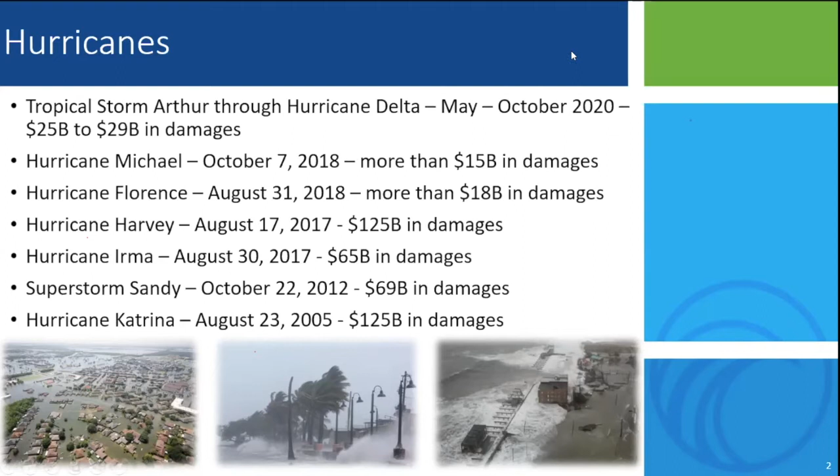So in addition to hurricanes, we have tsunamis. We don't think of them too much here, but you have Fukushima in 2011, $199 billion in damages. Essentially it wrecked a nuclear power plant, which created environmental and human damage as a result of radiation leaks from that plant. And then the tsunami in Indonesia in 2004, $19.9 billion in damages, but I think over 200,000 people were killed as a result of it. So a great cost in human life, and how do we look at these things and prepare for them in the future?

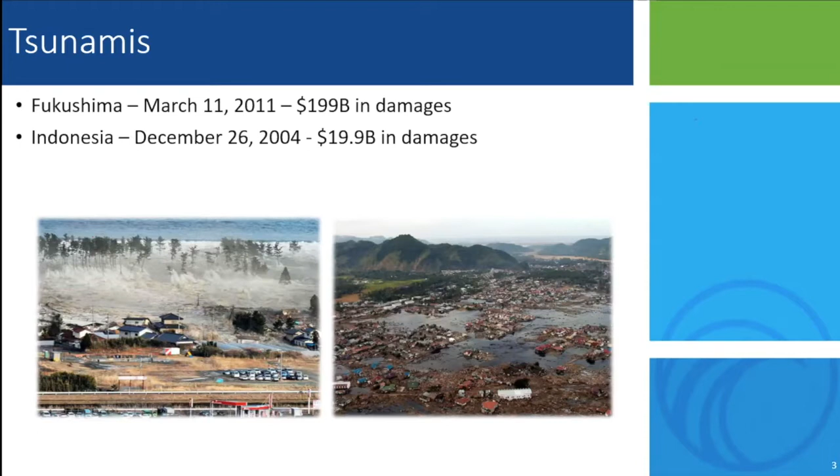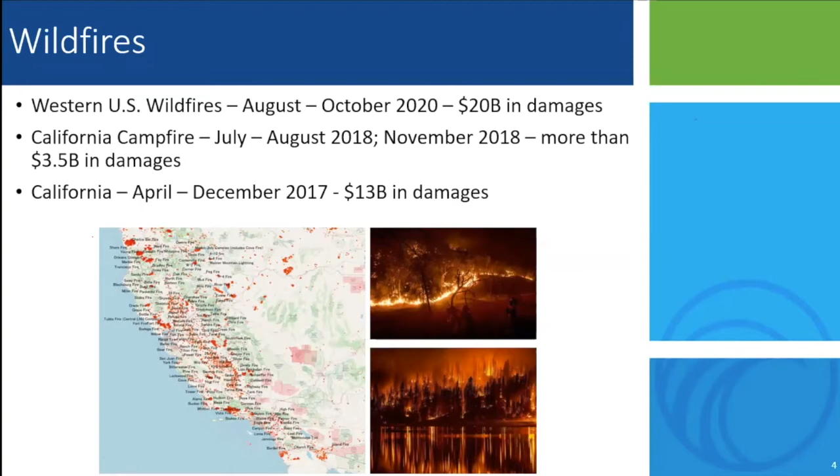Right. We have the wildfires, the Western U.S. wildfires this past summer. The estimate was $20 billion in damages. Two years ago was the California Camp Fire. Three years ago were other wildfires in California. Again, a continuing problem. How do we plan our infrastructure to be able to deal with these issues without tremendous damage and also without loss of human life?

The flooding: 2018, the Ohio River. January 2018, Boston and Cape Cod were flooded severely from rainfall. And then in 2018, as a result of Hurricane Florence, South Carolina had a dozen dam failures, which flooded out large areas. So again, things are happening out there that are stressing our engineering designs beyond what our normal design capabilities are. These are all extreme events that we're talking about, and how do we handle them?

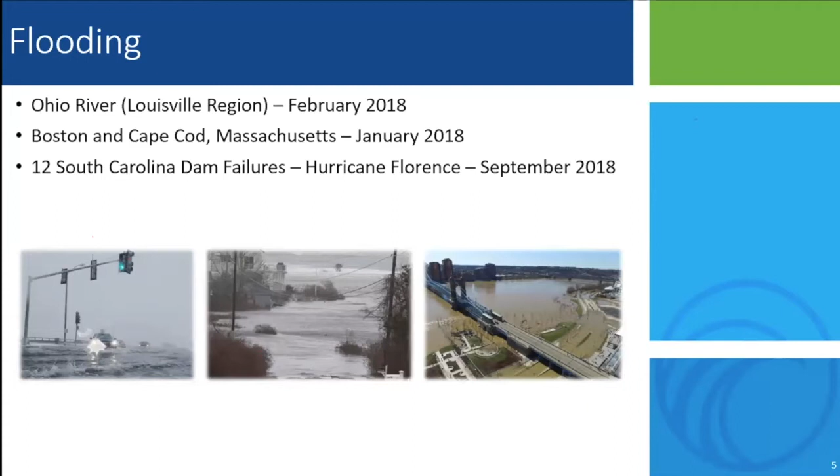And last but not least, all of a sudden, we're presented with COVID-19. Projected loss in GDP of about $20 trillion. Again, this is out of date. Current fatalities due to COVID, it's pushing 250,000 now. And the global number is I think 1.5 million, something. So continuing concerns. And now you start to say, okay, well, what does engineering have to do with COVID?

But if you look, some of the items we have to talk about: new design criteria for HVAC systems. Hospitals are now looking for 12 turnovers of air in a room in their HVAC systems rather than the normal design of 6. Well, how do we design this? Do we design it with a system where you can essentially flip a switch, change it from 12 to 6 or 6 to 12, depending on the situation?

There's no need to have 12 turnovers under normal conditions when you don't have COVID or some other type of disease going around, but you do need it other times. Why spend the money for power all the time? So how do we make these systems more resilient? You're going to need these MERV 13 filters, portable air filters, UVC disinfecting lights, all kinds of different technologies are coming up to control the airflow in hospitals, and you're going to see it in schools, you're seeing it in subway trains, railroad trains, airplanes, everything else.

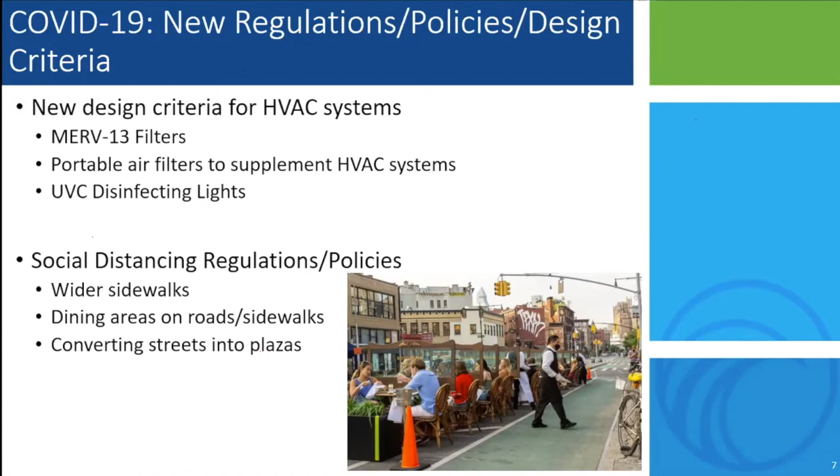Afterwards, once the situation has resolved itself, does the cleanup. We've got to clean up. There's going to be a whole mess, as you well know. If people's houses got inundated with floodwaters, they're going to be taking their soggy couches and throwing them out on the curb, as well as stuff that just comes down river and ends up on your front lawn that has to be removed, or clogging streets and the like. So you clean up. Then you go into reconstruction. How do we essentially build it back better?

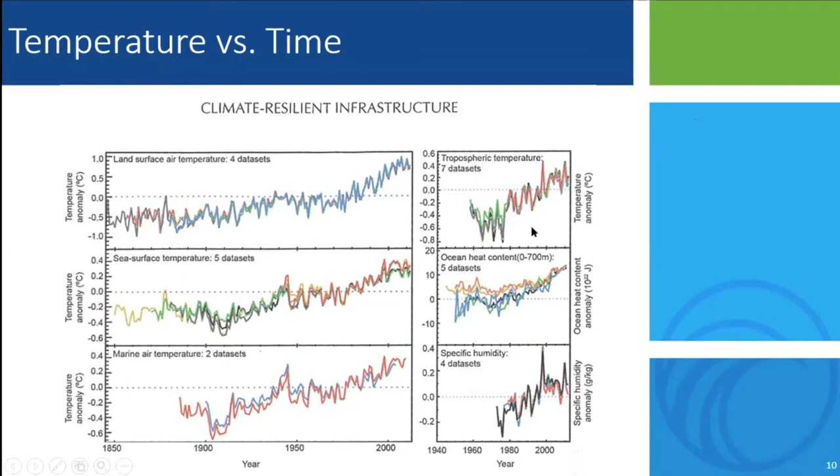Then we're looking at sea level, right? Same thing. This goes back to about 1875. Again, kind of a steady rise of sea level. And on the bottom, you see the Arctic sea ice dropping down. Increase in sea level isn't just related to glaciers calving off out of Antarctica or Greenland.

As the temperature rises, we all know that the water is expanding as a result. So you've got a combination of ice melting and contributing more water into the system, as well as, because of the temperature increasing, the water expanding, giving you sea level rise as a result of that. So it's not exactly one simple linear equation.

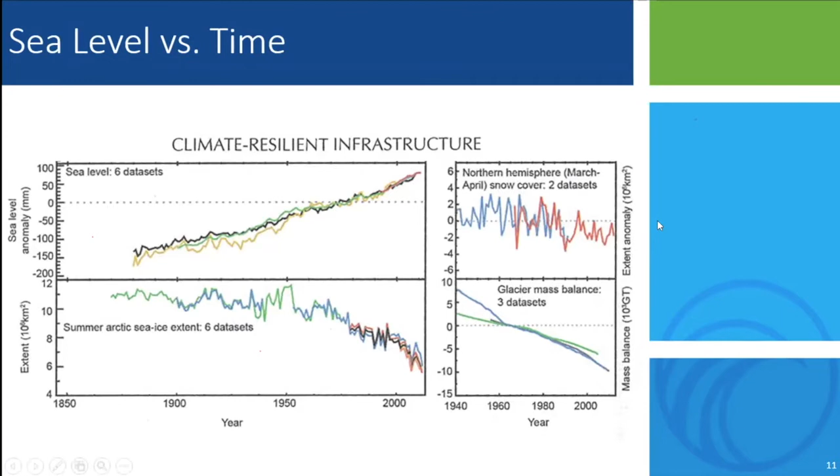And how do we deal with that uncertainty, particularly when we're designing things? We're easily, as civil engineers, designing things that have to survive until 2050, and many of them have to survive to year 2100. So this is what we're wrestling with in the future, and that's the hard part, and to some extent the fun part, seeing what's going to happen.

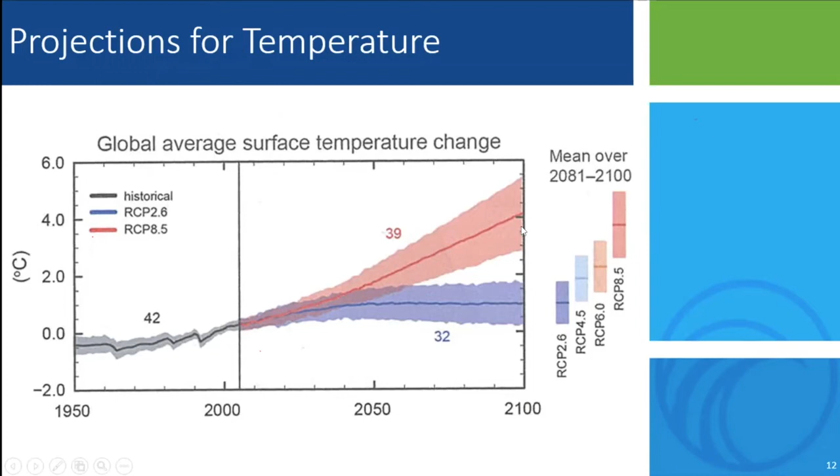And you can see the models stay pretty consistent, at least up until about 2040, 2050. You start to get a significant deviation, and then when you get way out there, they start to get further apart.

Okay, and we have the projections in sea level. Same deal. When you get out to 2100, you're talking an average of, and this is in meters, so this is about 0.45 meters. So we're talking, what, 16 inches or so. And on the lower model and the upper model, we're talking about 0.75 meters. So we're talking 30 inches or so of sea level rise.

And we come up to the top on the uncertainty area, and we're talking to a meter of sea level rise, about 39, 40 inches. So again, a wide variation in what we've got to design for as we look to the future. And how do we handle that? And we may be handling it at one point. We can say we can get to 2080 with the design we have, and after that time, that design is maybe obsolete, depending on what reality shows us and how this gets changed.

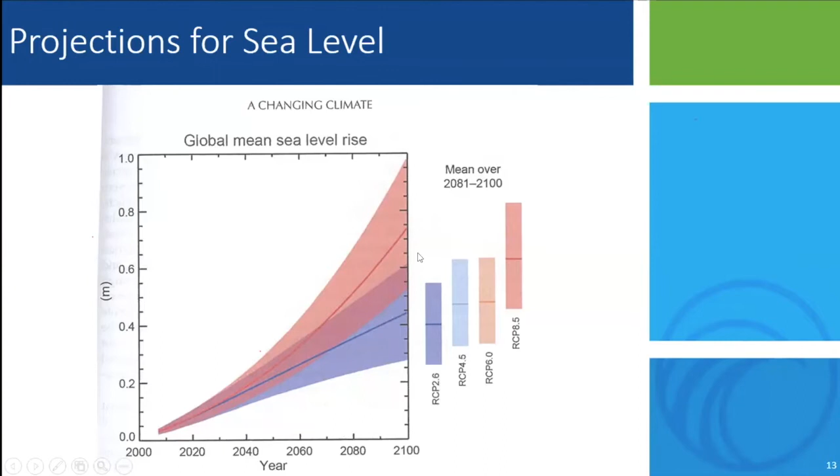Okay, so the times are changing. Old school engineering, what they taught me way back when in college, was everything is going to be the same as it was in the past. You have a 100-year storm, and that's based upon looking at past data, and you say, okay, this particular storm is going to have a 0.01 chance of occurrence in the future. It occurred once in 100 years in the past. It'll occur once in 100 years in the future.

At least that's statistically. Well, that doesn't work anymore because the stationarity assumption assumes that the mean stays the same, and everything in the future is going to look like it did in the past. That's not the case. So this mean is changing with time now. All of a sudden, this mean keeps moving up. So it's a moving target. So we've got to look at the future when we make our projections and we do our design work. What's going to happen? So it's a key aspect.

You look at a FEMA flood elevation of a 100-year flood elevation now. Well, that might not be a 1 in 100 in the future. That may be 1 in 50 or 1 in 25. So you've got to be careful in your design so that you incorporate that uncertainty.

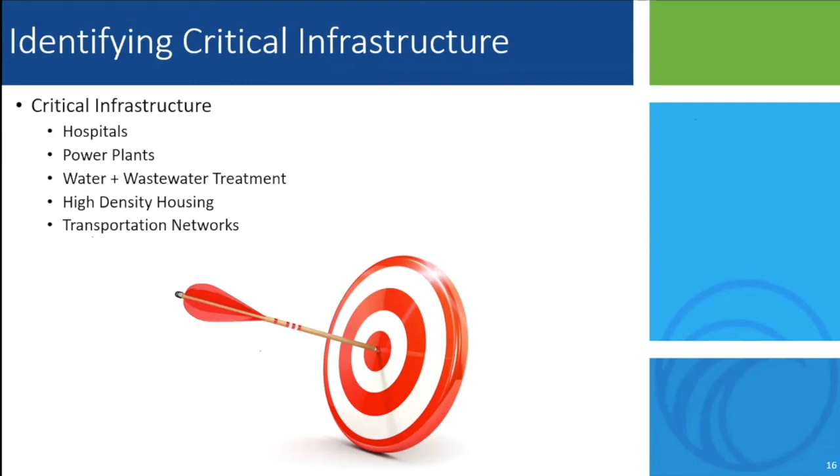And you've got all this infrastructure. You've got sewers beneath it, both storm sewers and sanitary sewers, and roadways that you may have to raise up to make them functional. We do a risk analysis. Excuse me. And we've got to look at the cost of resiliency. It needs to be less than the cost of damage times the probability of the damages.

So take, for example, Hurricane Katrina was $125 billion in damages. And say it's a 50-year storm, which is probably much less likely than that, but it may end up becoming more probable. So you just take 125 billion times 0.02, gives you $2.5 billion. Essentially, it's a yearly investment you could make, and still make it worthwhile for the protection that you have. So you can quantify this.

And it doesn't include in that calculation the protection of human life, which is another issue to deal with.

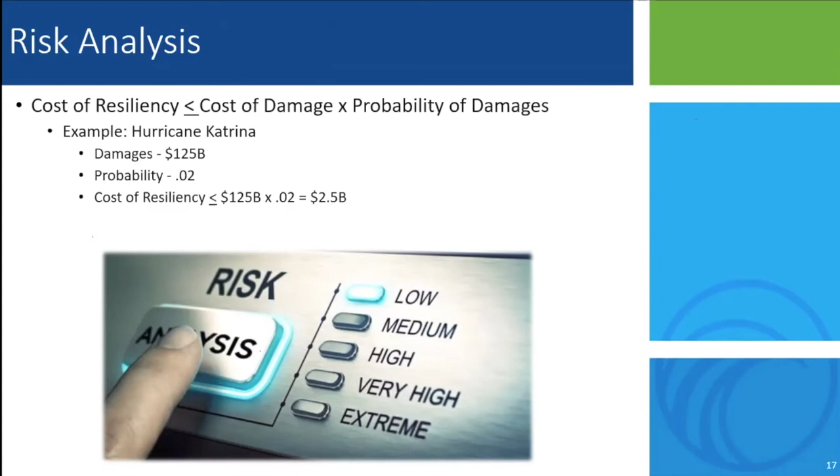Probably one of the biggest disasters, and kind of engineering in action. This is the biggest disaster on why the rationale was not good, and they really didn't look at it as a resilient type of situation.

This is the configuration of the levee. It's got sheet piles. It's got what they call an I-wall, which is essentially an I-beam. They've got an earthen levee here, and this I-wall is put down into the levee. The whole geotech analysis on supporting that, and under normal operations, the river level is here. It's not above the levee, and everyone's nice and happy.

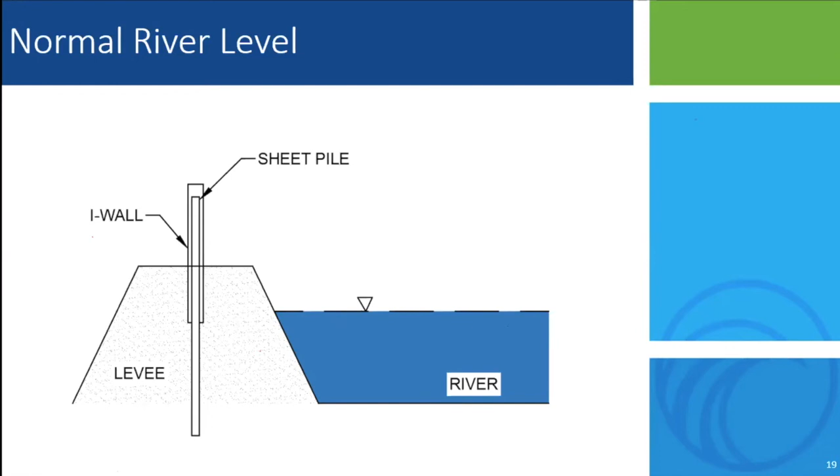Now, this levee and the sheet pile wall and the I-wall was designed for a 100-year storm, and so they did the analysis and said, okay, this is going to be the level of a 100-year storm right here. And there was no consideration for what happens if you have more than a 100-year storm. They said, the design is for a 100-year storm. We're going to fund for a 100-year storm. And that's it. Okay.

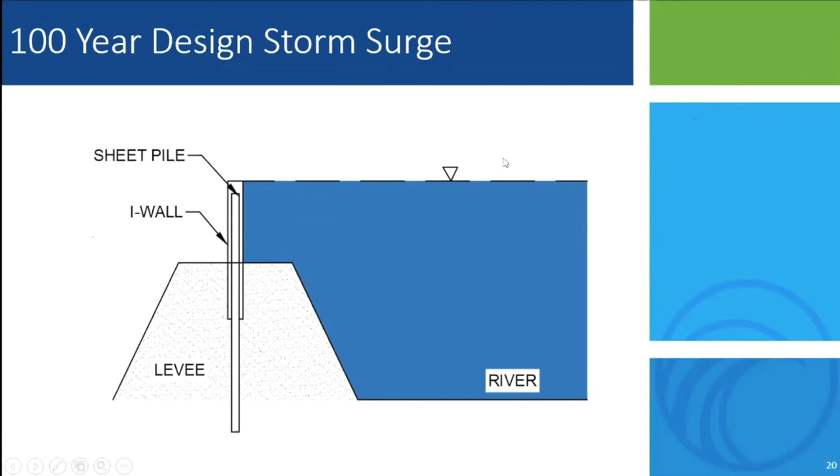And because they did that, they didn't put any cladding or armoring behind the levee wall. So this was just like a flat sand levee, and there wasn't anything behind it. So you got to the 100-year storm, and everything was great. You go above the 100-year storm, and the water comes over the top of the levee, and then drops like 10 feet. And because there was no armoring behind the levee wall, it eroded the levee behind the sheet pile, the I-wall.

And that then eliminated the resistance of the soil behind it, and the levee collapsed. Then, when the levee collapsed, you got all this water pouring through into the neighborhood.

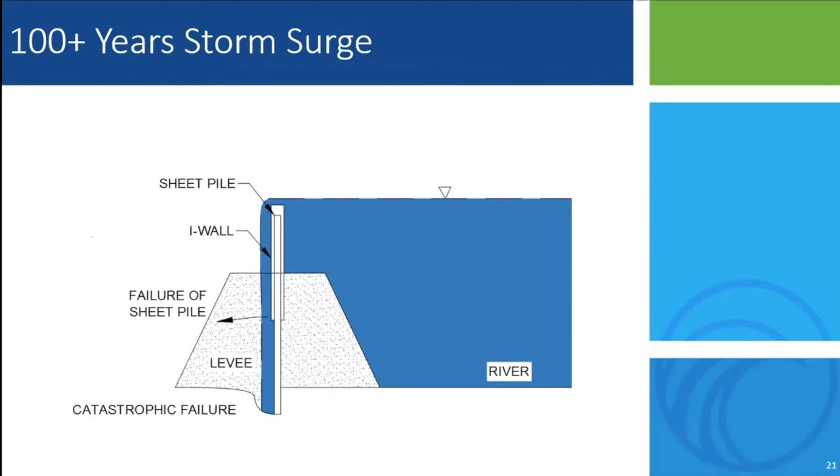So the message I want to get across is we've got to start looking to not just designing to a 100-year storm or designing to a certain aspect. We have to say, okay, what happens if it's worse than we thought it might be, and how do we protect from a catastrophic failure? It can fail, but let it fail gently and not catastrophically, where people just get inundated with the water in a very quick period of time. And that's what happened here.

Was it 2 days ago or yesterday? We had tornado warnings here on Long Island. That's largely unheard of. And all of a sudden, people were told to go to a room with no windows in some areas. So something completely new and different. Wildfires, groundwater, increasing groundwater levels, dealing with coastal flooding.

If we're putting up a wall, we've also got to understand that the water will want to go under that wall, and how do we design the depth of the wall to prevent the groundwater from upheaving on the other side of the wall. Loss of power. What happens if we lose power? So we don't have a catastrophic situation where we've got no power, and then our sewer pumps don't work, or our water pumps don't work, or we lose refrigeration. So how do we account for that?

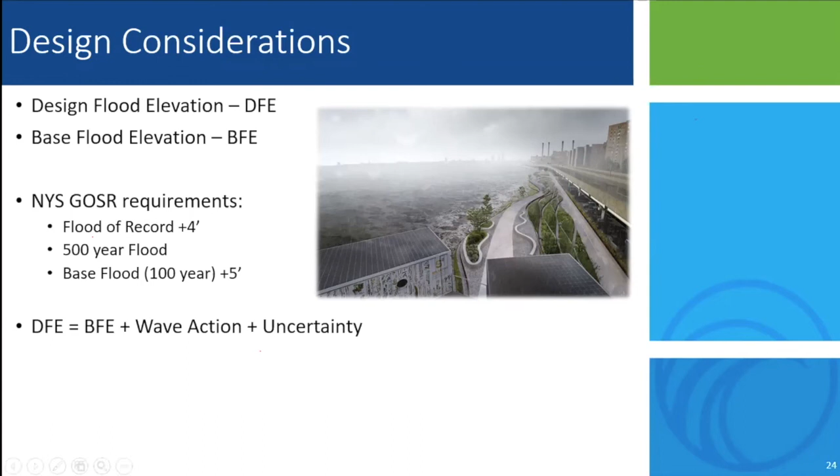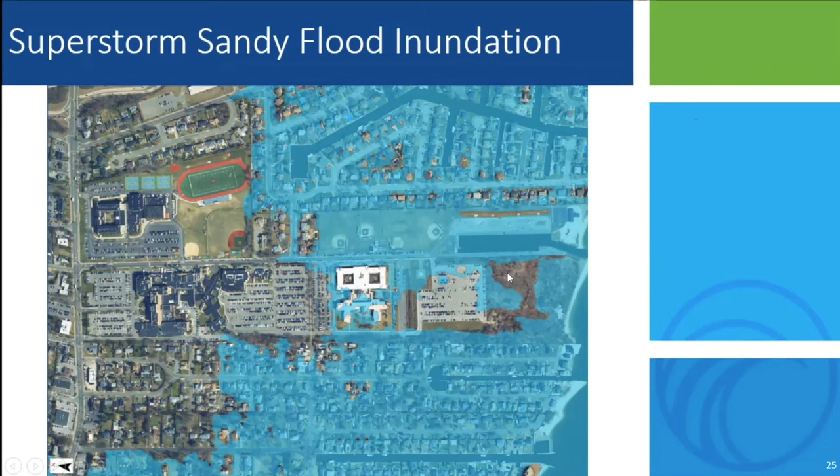So that's a good example of resilient design, and it incorporates natural aspects as well as engineered aspects, as well as getting the correct elevation and making sure everything works together. And I think that's what we got.

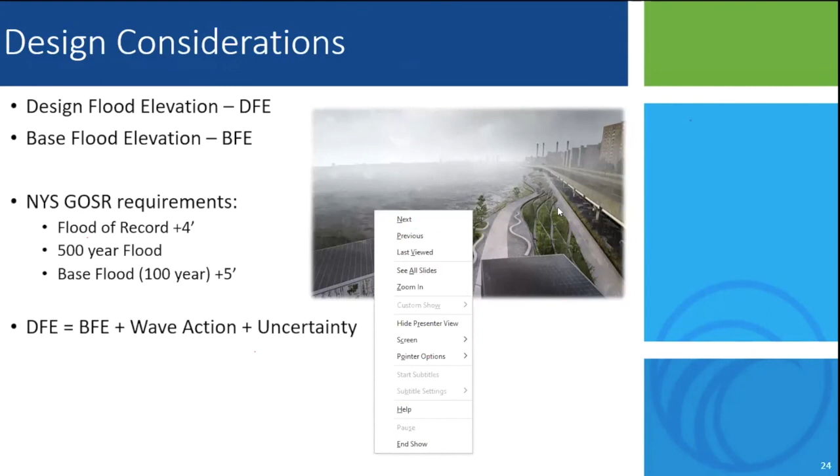The question was, relative to New York City, you talked about sea level rise up to 1 meter, but how do we address storm surges that can be many feet? Yeah, if we go back a few slides, this actually shows part of that big U that they're talking about here. This is designed to take that 6 or 8 foot of storm surge in the southern Manhattan area. Also, flood doors on the tunnels, that type of thing. So there are designs being worked on to take care of the storm surge as well.

So to answer, that design flood elevation incorporates the storm surge as part of the base flood elevation, and then they add the 28 or 30 inches on top of that to account for sea level rise. So both are accounted for.